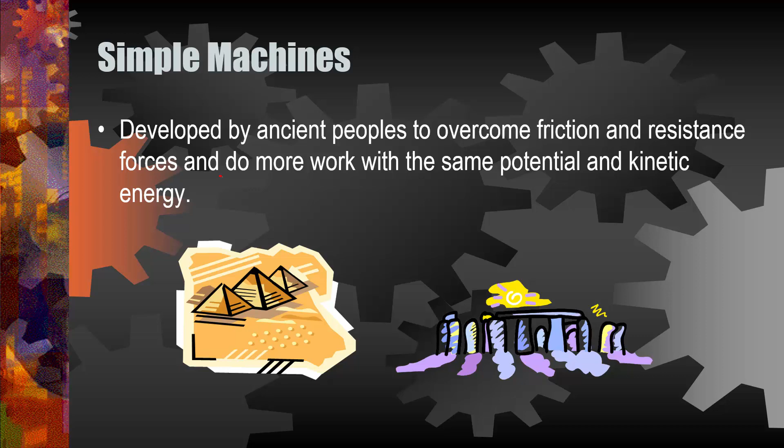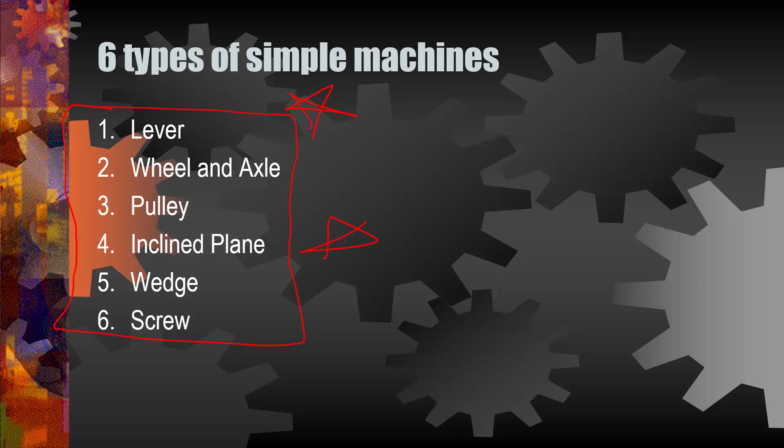Simple machines were developed by ancient peoples to overcome friction and resistance and basically to do more work with the same potential and kinetic energy. So the goal of all machines: do more work with less effort. Yay! There are 6 types of simple machines. Know all of these. Memorize all of these. Know these really well. I have no idea why, but you should really know all 6 of these thingies. Now let's walk through each one of them one at a time.

First off, we have a wheel and an axle. A wheel and an axle consists of a large wheel that's fixed upon a smaller wheel, otherwise called an axle. Now your car has an axle that, over here, is connected to a drivetrain. But anyway, this axle is connected here, and that turns, and this turns, and ultimately then it turns the wheel, and your car moves, and that's happy days.

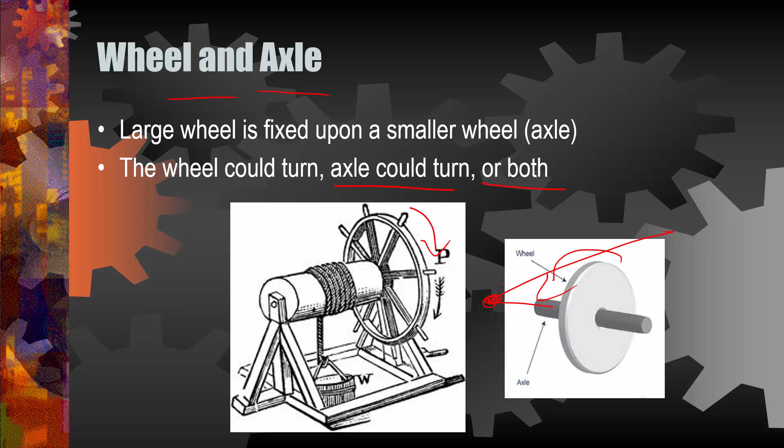This other wheel, this guy here, means that the axle turns and in turn turns the wheel as well, so then both turn. So for this to work, either the axle just moves the wheel, or the wheel can move the axle and that can move a bucket up a well and you can drink water instead of dying. So here's a wheel and we turn it that way, and that turns this axle, and then that in turn turns the rope, and then it pulls up water, and you don't have to exert so much energy because, yeah, wheels are awesome. So wheels and axles.

Next, we have a pulley. A pulley is nothing more than a grooved wheel. So there's a wheel, and it has a groove in it. We stick a rope in there, we attach a weight to it, and then we pull. Now, we only count the efficiency or the mechanical advantage, which you'll learn about in just a second, when things go with the motion. So our ball, or whatever this is, is going up, and we only have one rope also going up, because this rope is going down, so therefore the mechanical advantage of this pulley is 1. You have no idea what that means, but don't worry about it. We'll talk about that in the next lesson, and I figured you should be exposed to it now. So there you go.

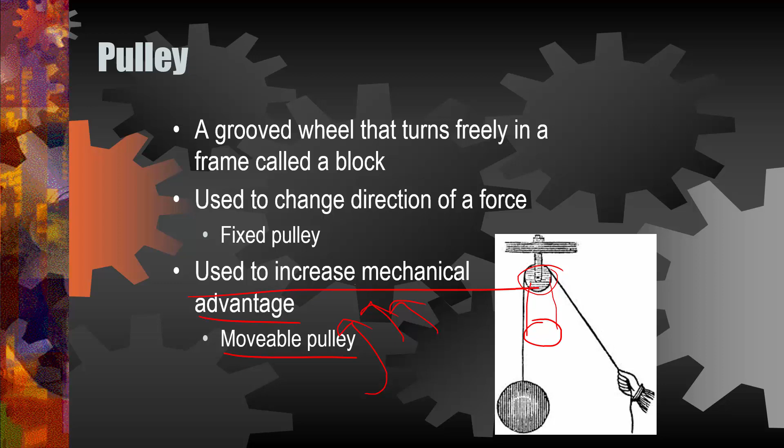See, used to increase mechanical advantage, and you thought I was crazy. A movable pulley is where we have, this is a single pulley. There's this guy. He's kind of lonely, so we add a friend, and we move a rope there and move a rope there, and now we have 2 pulleys and a bunch more ropes, and we do more work because, again, we increase mechanical advantage, which is good because the entire goal of all simple machines is to increase mechanical advantage, therefore allowing us to exert the least amount of force possible and achieve our ultimate state of laziness.

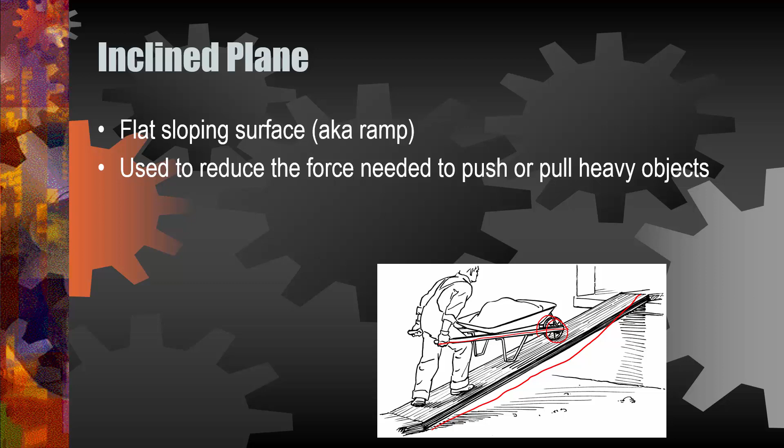Then we have an inclined plane. This picture is so incredibly detailed. Inclined plane, super fancy machine, right? There's a piece of wood on an inclined plane, and that actually reduces the force of gravity, which is cool because, again, that increases mechanical advantage, which is the point of all simple machines. In this picture, you actually have 3 simple machines. You have a wheel and axle, you have a lever, and you have an inclined plane. Whoa, that's craziness.

And then we have a wedge, a thing like an axe. A wedge is just an inclined plane. See, inclined plane like that, and like that, but then laid on its side. So if it's set this way, we can then smash it into a block this way and split things apart. See, my drawing is almost as good as this picture here. You know it is. So a wedge is just something you drive in between something, and it spreads them apart.

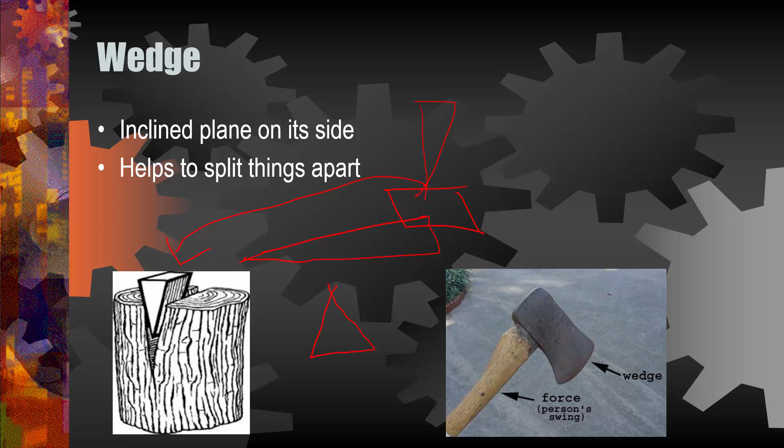So if you have a friend like that, perhaps you should not be friends with them anymore.

And then we have a screw. A screw is a thing that allows for rotational force to become linear. What that means is, you can see in this picture, we have a screw, and we have a bunch of rotations or circles attached to a line, attached to a gear, and what that does is it allows, as the wheels turn, if you will, it pulls up a little bit of water in each increment, and it dumps it here. And this takes way less effort to do than if I were to just take a big giant bucket and lift it straight upwards. Okay, so this again increases mechanical advantage, and that's a screw.

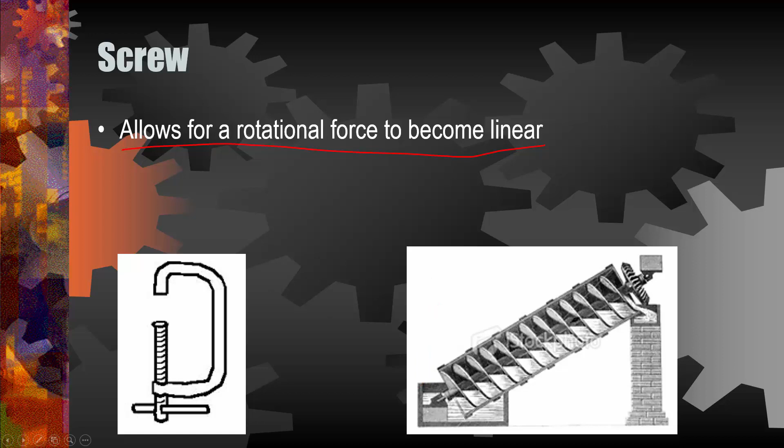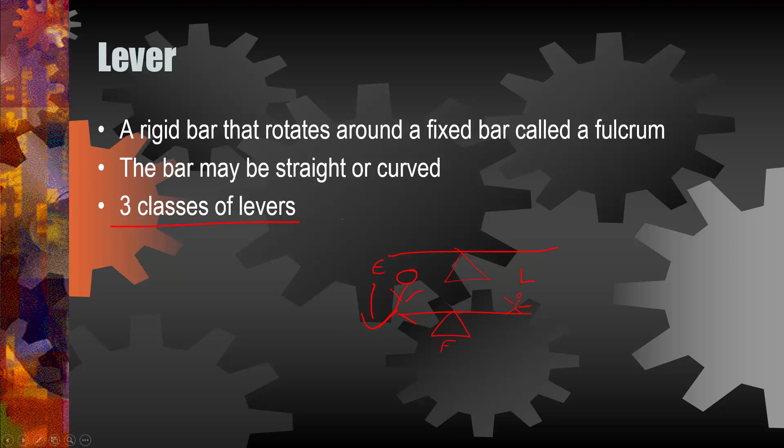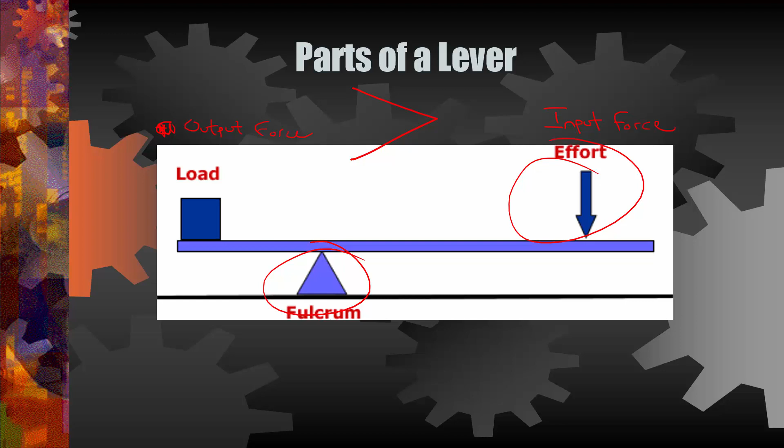And there are three classes of levers, which we'll talk about coming up, I think, somewhere right around the next slide. So again, fulcrum. Effort is the force that you input, so that is input force. And then you have load, which is also called the output force. And what we really want is that output force is way bigger than the input force. Yay. Okay, so there are three classes of levers.

Yes, I would know these. That's not a star. There's a star, and there's a star, and those are crappy stars. Let me try. Star. There we go. Okay, so know these guys. These guys are important.

The first class of lever is the classic seesaw example where you have a fulcrum and you have output force on one side and input force on the other. Remember, input force is the same thing as effort. Output force is the same thing as load. So that would be the same type of thingy as like a pair of pliers or a teeter-totter or something of that like. So you input a little tiny force and you get out a big output force.

That's first class lever. Second class lever, your fulcrum, dang it, it's been moved all the way to the end. Your input force still goes up here on this end, and the output force is now somewhere in the middle. So your load's in the middle, your effort's in the back, and hey, we have a wheelbarrow, and that's a second class lever. And then finally, we have a third class lever, and the third class lever has a similar setup, but slightly different than the second one.

So third class lever, fulcrum is still at the end, just like second class. The big difference? Input and output force have now shifted. So we have effort here and we have load here, whereas in second class we had effort on the end and load in the middle. So input force, if we look at our elbow, there's our fulcrum, elbow. We have an input force. That would be like our bicep connecting to the tendons in our forearm. That's where our input force comes from. And then voila, our load or a dumbbell gets lifted up. So that is the effort force.

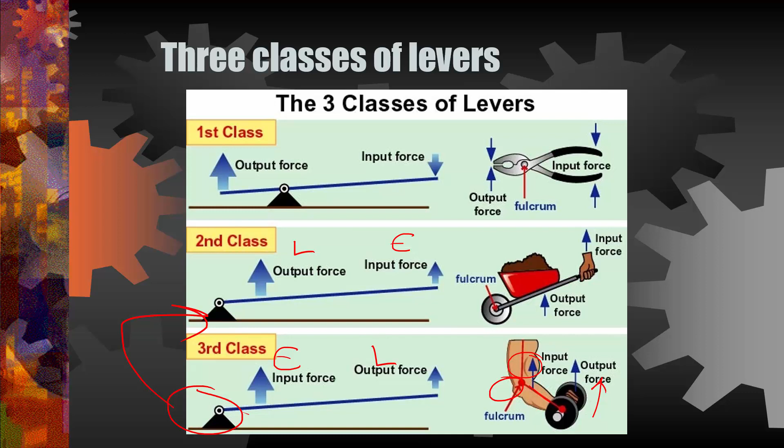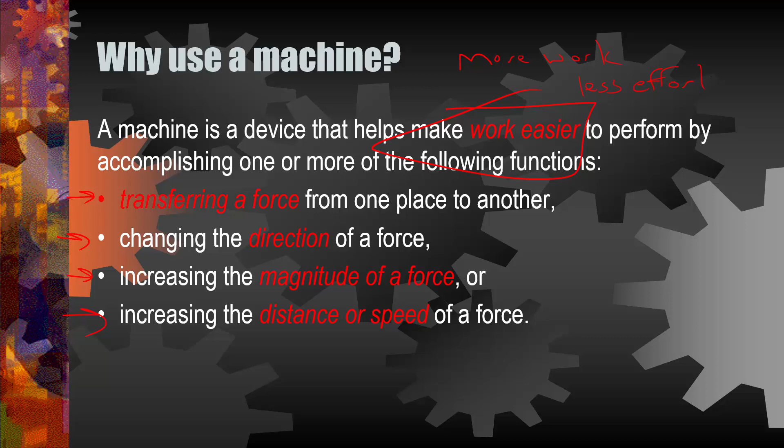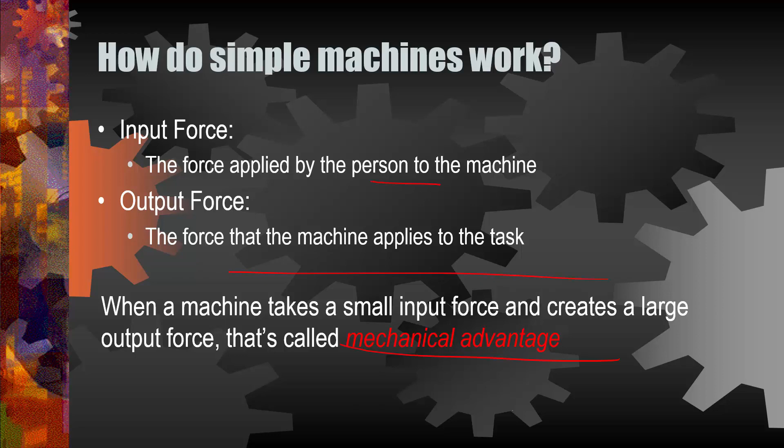And ultimately why you want to use a machine is that you want to do more work with less energy, less effort. So we can all achieve our Zen-like state of laziness. Oops. How do simple machines work? They give you a mechanical advantage. So therefore, your input force is small and your output force is big. And we get a mechanical advantage. And we'll talk more about that in the next lesson.